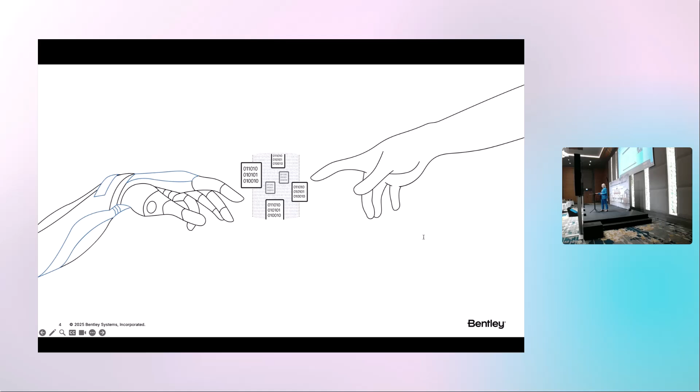And that is one part of it. The other part of it is context. So engineering context also has to be available. While disciplines that we work with, like transportation, energy, water, or cities, they all have different needs and they all have their own different challenges. Some of them are the same, but they're also different. And then each of those sectors has, again, both similar but also unique engineering principles, rules, and logic. And this is what we mean when we talk about engineering context.

So the AI needs to be just as aware of that engineering context. And that's a bit more all-encompassing. That's not just the data, it's also how we utilize it and how we actually teach it to apply that intelligence. So if the relevant engineering context has been applied, that's when we actually succeed in training our AI well. So apart from this very wordy intro, I would like to spend the rest of this presentation showing you what AI can be capable of when data and context come together, and how we currently see it applied and how we try to put it out in the industry to hopefully influence your workflow before long, that you actually use it and that it helps you.

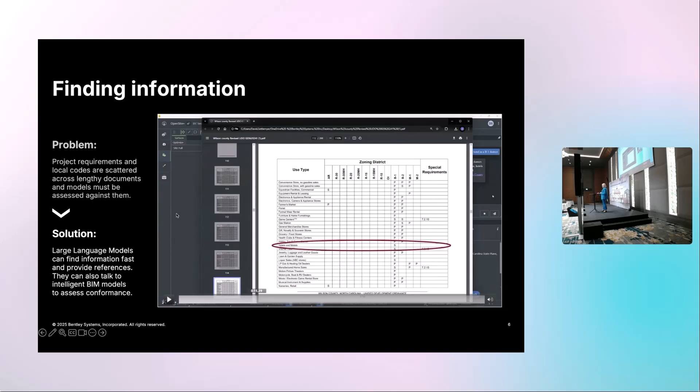I'm really sorry, when I tried it, it worked no problem.

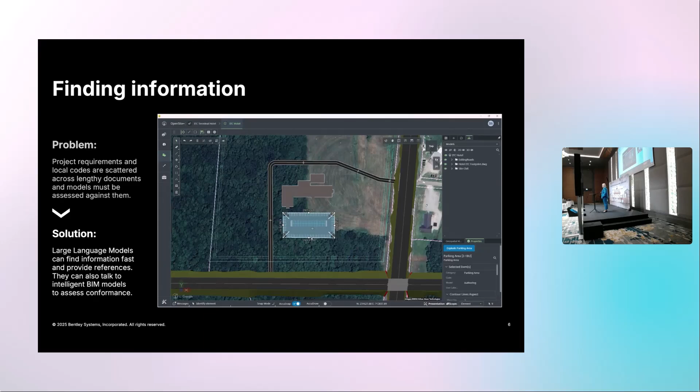It doesn't stop here though, as these large language models can also talk to intelligent BIM models to assess conformance and make sure that nothing is forgotten or omitted. As you can see, we're actually using natural language here to ask the model to check against requirements, like if something can be built here. That is, of course, a lot easier than trying to scan through a lot of documents and find that information yourself, manually.

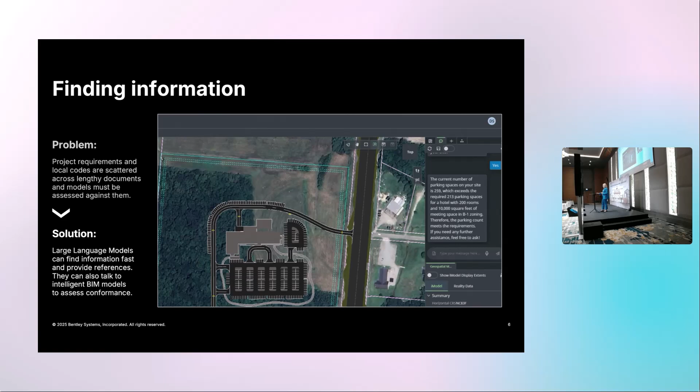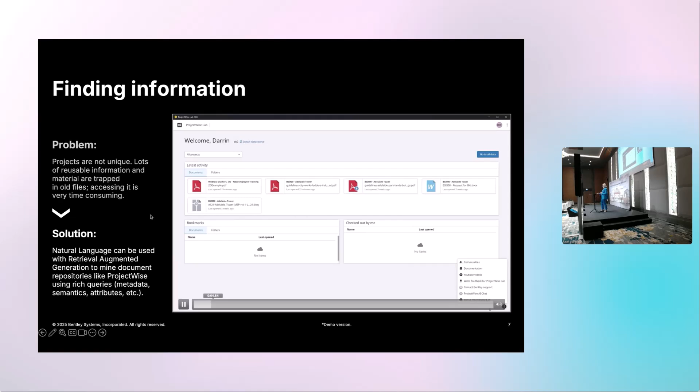The next example about finding data is, and I hope this runs, also gets stuck. The problem with presentation mode.

So there's a lot of information in your projects already. Projects are not unique. You may have done something similar already, in a whole bunch of projects before. The problem is, where are those old files? Is the information locked in old formats? Maybe it isn't even well tagged. You need several applications to open it, and sifting through a lot of material is, of course, time consuming.

So if you have a repository for your documents—in our case, that's a Bentley document repository—you could use AI to interrogate that repository.

While text search, I'll just try to advance this manually a bit so you can see what we're doing. Text search is, of course, nothing new, but... hang on.

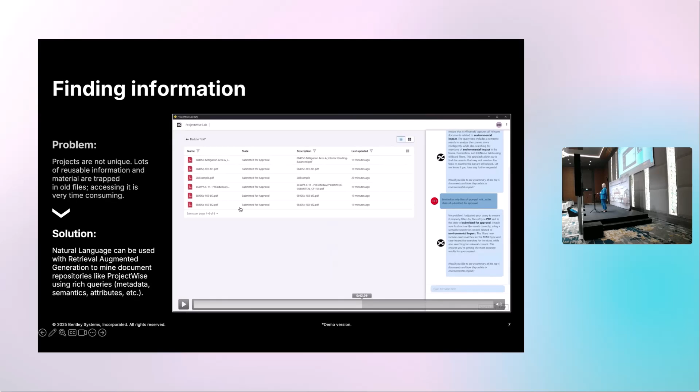The new thing is that you can actually use your own natural language query and refine the search based on what you actually need to find. That is, of course, a lot more convenient than anything we had before.

And the search selection that you then get, you can have a closer look, and you can also of course then jump to the files right from there to see if you really have the relevant information.

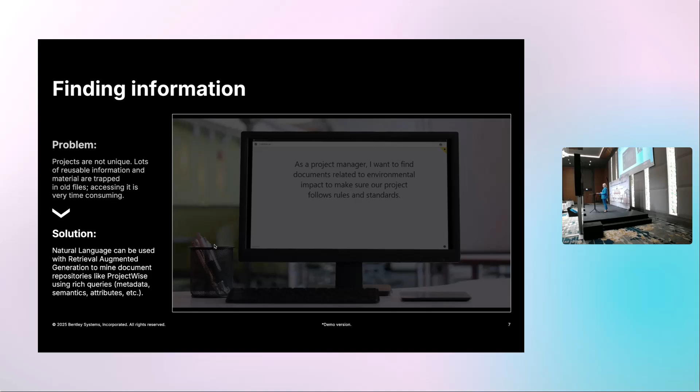Then another big issue is around automating tasks, and I'm talking specifically about creating drawings. Creating documentation, unfortunately, even in our digital age, will not go away. We will still be required to create paper. And that is something that I've understood is super, super time consuming—not just creating all those plans, but also making sure they're actually readable.

Something very simple: little text blocks that overlay each other. An engineer has to use very expensive and valuable time ensuring those little text blocks don't overlap but are moved out of the way, and are surrounded by some white space—we call that white space management at the moment. Making sure everything is clear and readable takes significant time and effort. I see Greg back there, and I know this is something you're struggling with, but I've heard that from other companies as well—it really costs a lot of money.

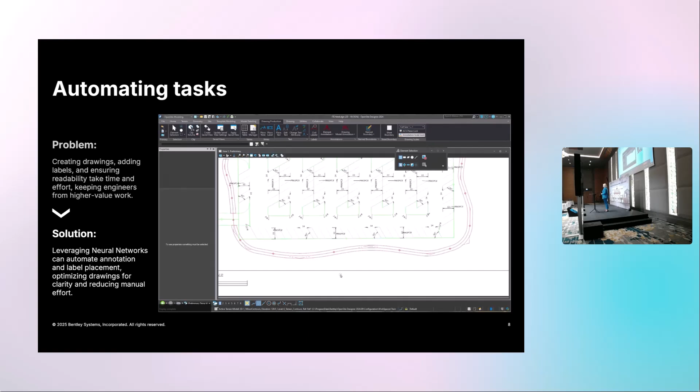So we have an example here where we have a neural network that automates annotation and label placement, and that way we're optimizing drawings for clarity with a lot less manual effort. That was probably the main use case we got from our users to apply AI in—documentation and drawing production—especially making it a lot easier with the annotations to ensure they're readable.

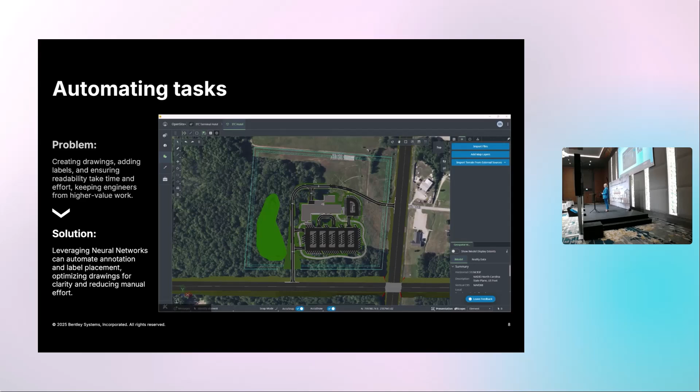Next, let's talk about exploring the design space. This is about exploring different options and using the data contained within.

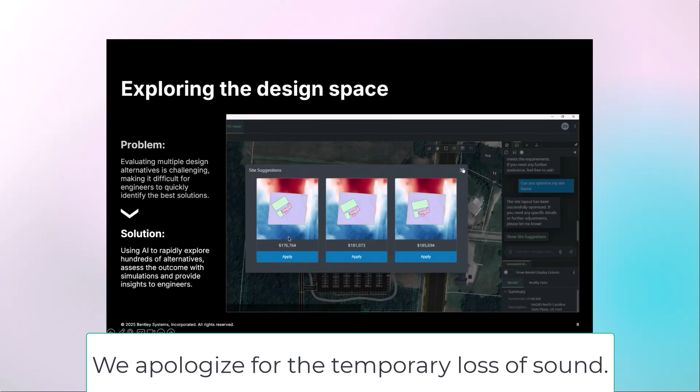Some of those decisions may be driven by cost, but there may also be reasons to apply or go for an option not just because of cost, but these parameters are up to you and are defined by your project. In any case, evaluating multiple design alternatives can be challenging, because if you do everything manually and try to bring it together with costing data, that means having a whole bunch of documents open, a lot of checking efforts, et cetera.

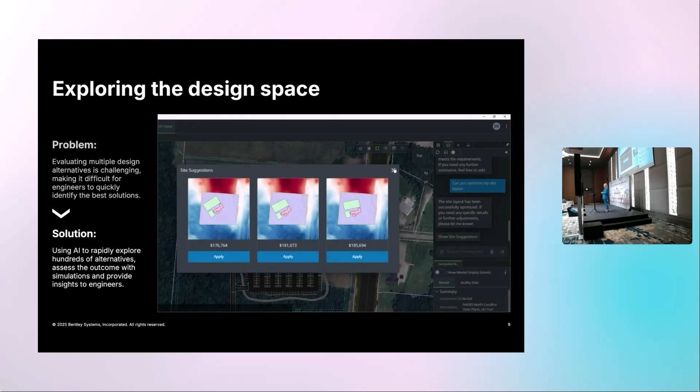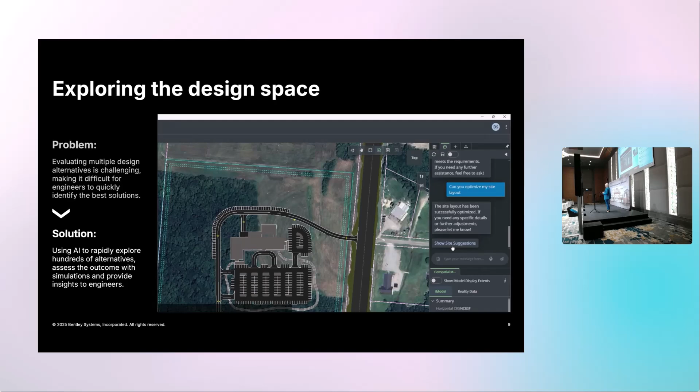So AI obviously can help with that, especially when it comes to bringing data together. Our AI Copilot now is picking the best option based on cost to optimize the site layout. You can see that when we do this, you pick one option, and then we still do some changes to the layout, and we arrive at the best possible option for our site. A lot of that is done by telling the AI in natural language what you want it to change. That is a big productivity gain to rapidly explore, match it against your parameters, and log the data contained in there, and it brings you a lot more insight.

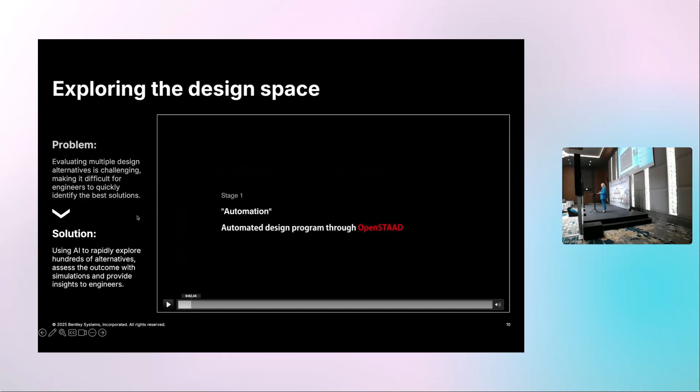If you are more on the structural engineering side, you can bring AI together with automation. In this example, if it does run - it's another one that stopped. You can see that we are automating here a big structure. It's a roof structure, and this is not AI - that's just automation based on a macro where we get all sorts of different options for a steel structure.

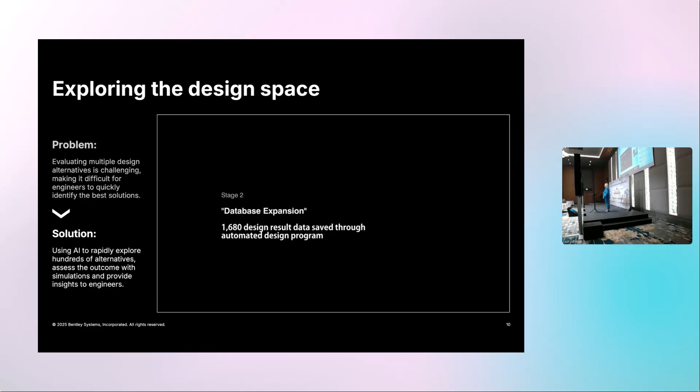I think it's exactly 1,680. That is saved now, and now you can again bring additional information in. That's where AI comes in, and you overlay that, and you can literally explore 10,000s of options that way, like this best preferred steel structure - what is the best possible material you can apply to it. So you can see we actually expanded it to 27 million and something.

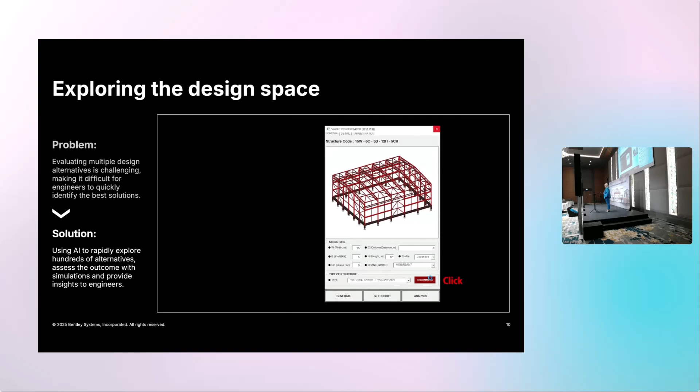Applied, and that way it can actually go as far as costing and again provide you another layer of evaluating. This is something that would have taken a structural engineer probably a few weeks, but you can do that in hours now if you simulate it like that.

Again, there's a need for data openness. The whole structure needs to be open, but also the documents where you find the information that will be aligned with the structure and with the actual model - that also needs to be accessible.

Of course in our industry, the design phase is only short, pretty brief in the context of a whole project. If you look at construction, it very often takes longer than design, or usually takes longer than design. And then the operations and maintenance phase, even longer.

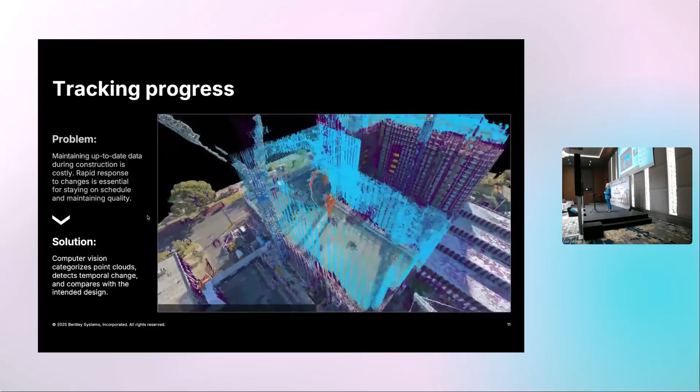How can you apply AI to track progress? Pretty easy to see the benefits. You can take computer vision of your actual progress on site, of the building site, what's happening, and you can overlay that with a model that you built in the computer. Like the definition of a digital twin, as we heard this morning, is that there needs to be a real physical asset there. So a BIM model that just exists in theory is not really a digital twin quite yet, but this is where you bring the model into reality and where you can actually see a digital twin really emerging through that added layer of reality.

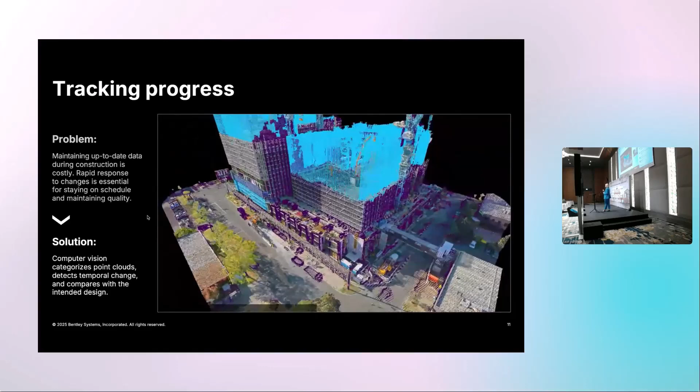And of course, it also helps you to detect temporal change. You can compare with the intended design. You can spot where there's divergence, and pretty early already spot problems during the construction.

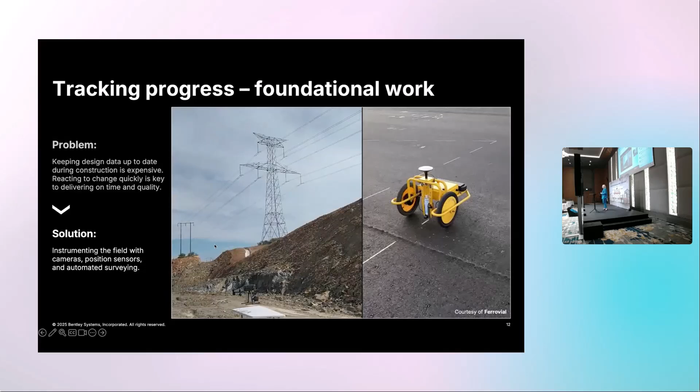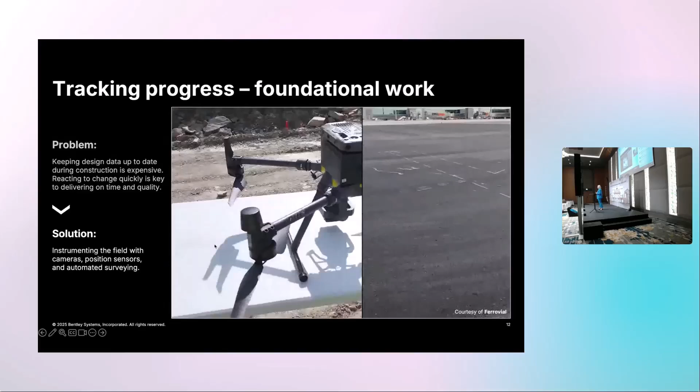That doesn't just apply to buildings. I'm an architect myself, so the building examples speak always a bit better to me than the more linear examples, but I know we have road and rail designers as well, and in Bentley that is pretty much our core work too. So you can do the same, keep design data up to date during construction, and especially with more expanded projects, it gets even more complicated than with buildings because you're looking at a much larger area. But if you instrument the field with cameras and position sensors and automated surveying, you can use those sensors to check in, to automatically monitor from check-in points whether your intended design is really what is going to be put into reality.

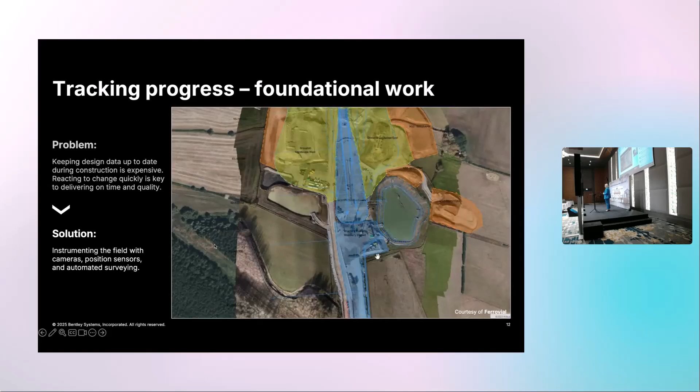So let's move to operations and maintenance. As said, we are mainly working in infrastructure, and there's a lot going on with roads. It's about the status of the roads. Do you have potholes? Are the roads well maintained? Are there any risks for accidents? But of course, there's also a lot of elements in roads that

May or may not be visible. I think the video hangs, but for me it's running. I don't know why there is a delay.

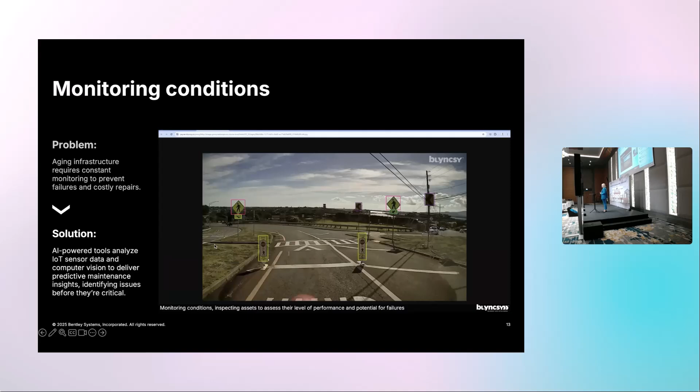The fact that infrastructure is aging is not just a problem in Germany, and we're very keenly aware of it at the moment, but it's a problem globally as well. So AI-powered tools that can analyze IoT sensor data and computer vision are very powerful because they enable you to check long stretches of road and actually make sure that everything is visible that is going on those roads, whether traffic lights are not working, whether a roadside is damaged, and whether there's any risk for accidents.

Unfortunately, the video doesn't run well. I don't know. Okay, now it's running. Okay. Anyway, you can see what I was talking about.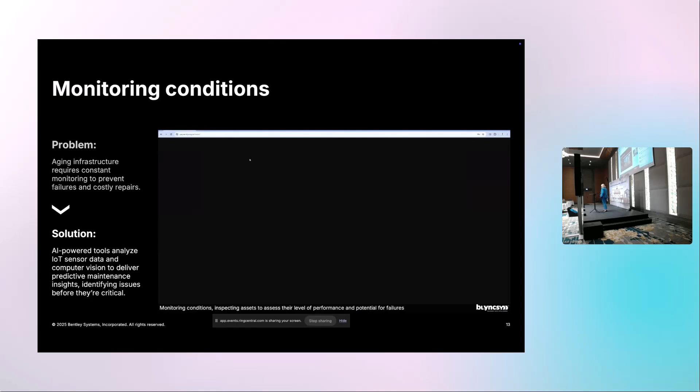So it's about a network of roads here, and you can check computer vision data, and this is actually being produced by just driving in a car using the camera that you may have, and it will monitor the roads, all the signs, traffic lights that are along those road highways, and feed the data back into your model. And the AI can also help you analyze where there's conditions that are not as they should be.

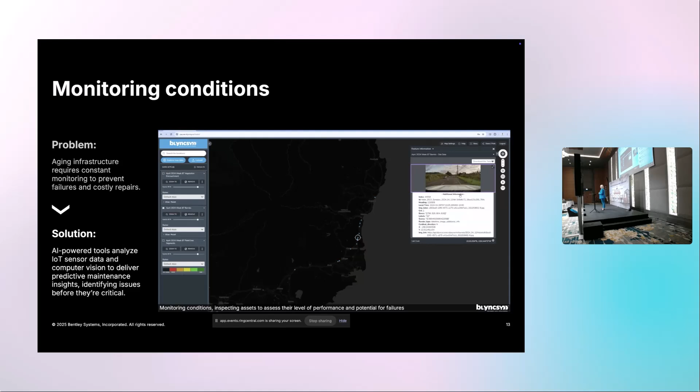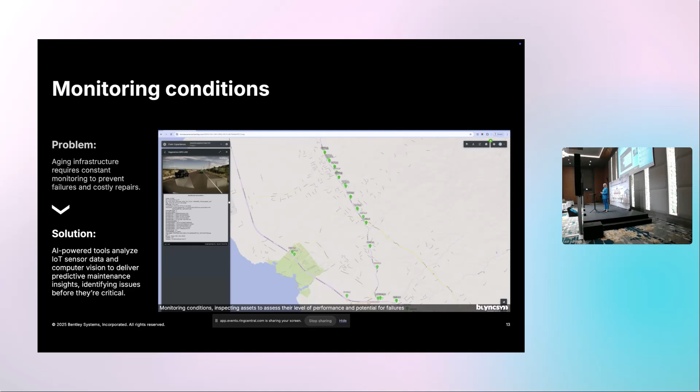You can see in one of the examples that there is a pothole in the road, there's a traffic cone in the middle of the road, so somebody needs to come pick it up. These are all things that will be very hard to find if you try to do that manually. You would be driving up and down that road network like crazy. And that way you can use artificial intelligence to detect that, but it's also recorded automatically and overlaid automatically. So pretty cool technology, and especially for government agencies who are surveying and maintaining roads, this is a big relief.

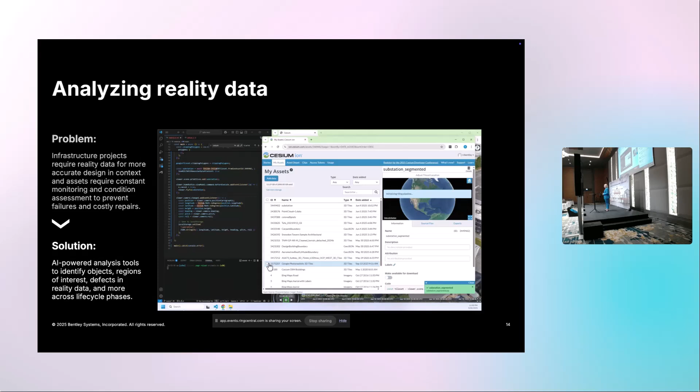Now, the last example, a bit in line with what Christoph showed this morning, is about analyzing reality data. I'm using Google 3D tiles here for the backdrop, but we also brought in a more detailed design model. Again, we're showing here how you can overlay this data. You can both put it in context, but also put in this little substation to make sure you can actually see it in its context.

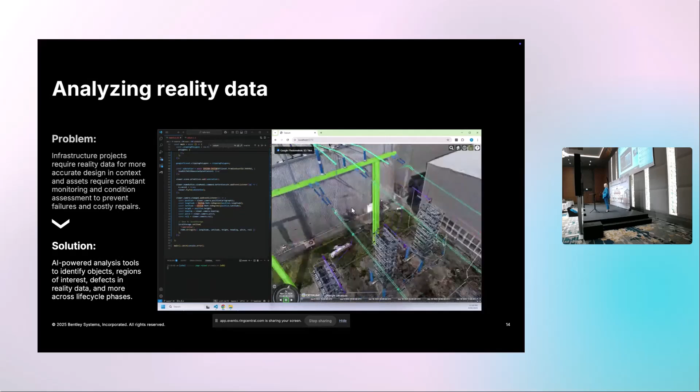But you can also enable AI to do analysis, to identify areas that are not as they should be, and AI can detect it automatically if there's areas that don't look like other bits and pieces in that model, to help you really be very fast and upfront with any issues during operation and maintenance.

And that's pretty much what I wanted to show you. So a quick roundup in where we are and where we see the industry going through a few critical infrastructure life cycle phases.

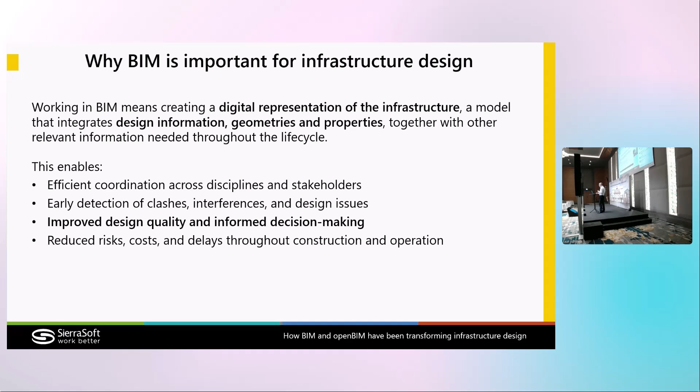Working in BIM means creating a digital representation of infrastructure, a model that integrates design information, geometries, and properties, together with other relevant information needed throughout the life cycle. This enables efficient coordination across discipline and stakeholders, early detection of clash interferences and design issues, improved design quality and informed decision-making, and reduced risk, cost, and delay throughout construction and operation.

The adoption of BIM has a strong impact on infrastructure design. Even if BIM increases initial cost and complexity, it creates significant opportunities for efficiency and quality. This impact can be effectively managed by using effective and efficient software tools, adopting open standards, and following an optimized workflow based on effective tools and standards and consistent with the domain.

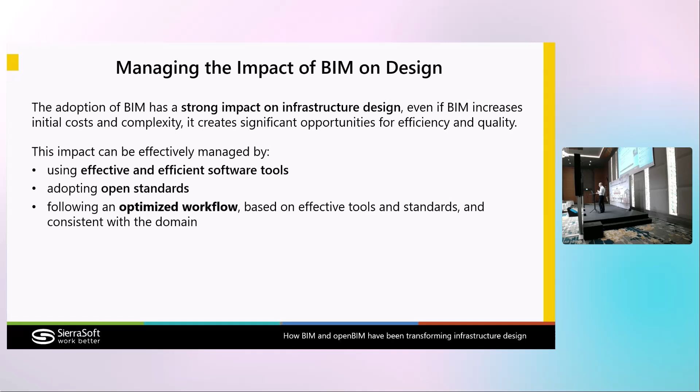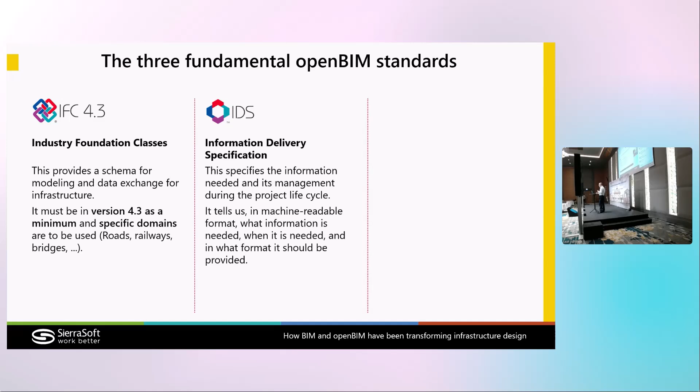There are three fundamental openBIM standards to use during the design phase. One is the IFC. It must be in version 4.3 as the minimum for the specific domain to be used, roads, railway, bridges. IDS, the Information Delivery Specification, and buildingSMART Data Dictionary.

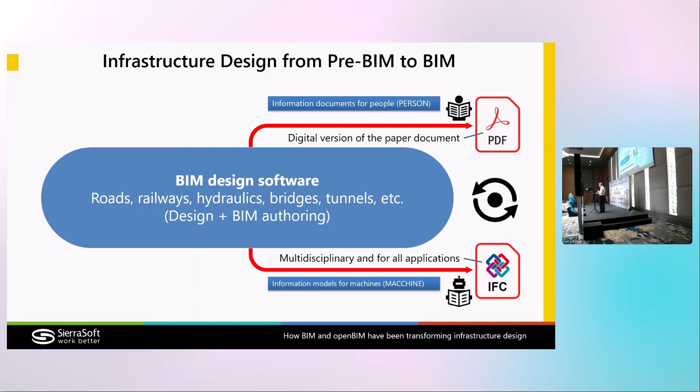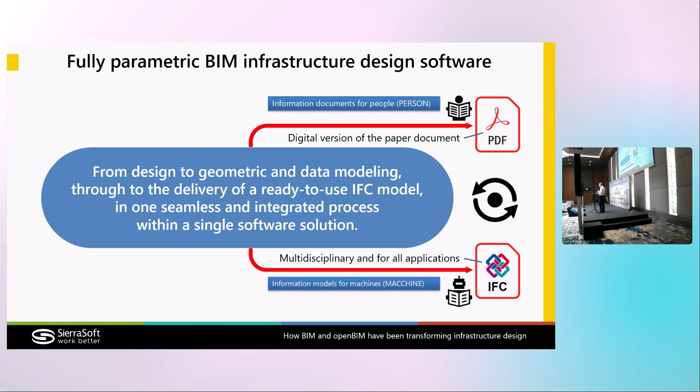The only way to make design effective and efficient is to use software that integrates everything into a single solution. You need a fully parametric BIM infrastructure design software, from design to geometric and data modeling through the delivery of a ready-to-use IFC model in one seamless and integrated process with a single software solution. A single software that integrates features of design and geometry modeling, structure and data modeling, model exchange and federation, and model analysis and validation.

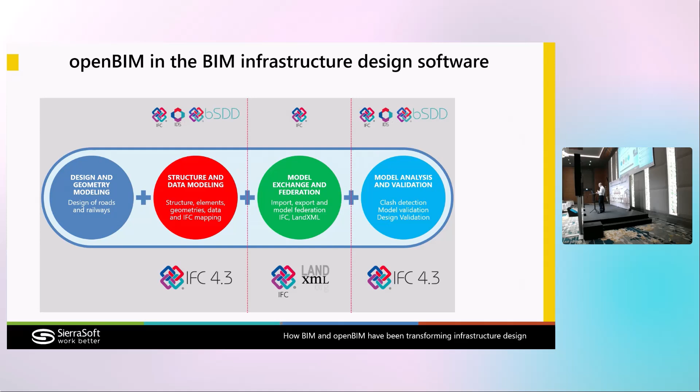How openBIM integrates into the design process. We use IFC, IDS, and BSDD during the structure and data modeling, IFC for model exchange and federation, and IFC, IDS, and BSDD for model analysis and validation. With a parametric system like this, the final model is automatically updated every time a change is made to the design or data. The focus is on design, the result is the model.

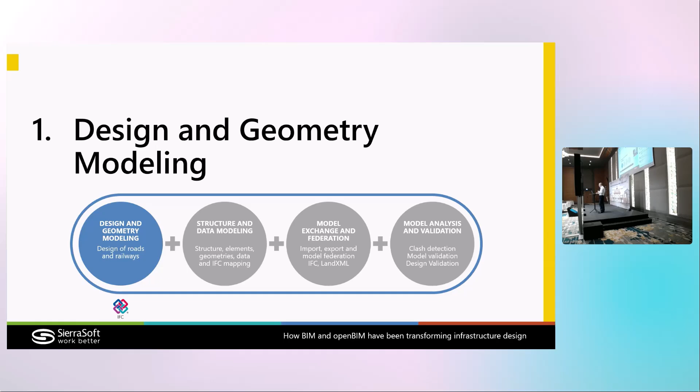And now a practical example in how BIM and openBIM have been transforming infrastructure design. It's a demo with our solution, the software is SierraSoft Infra Design Studio. For first, design and geometry modeling.

The design of the road is done in parametric and dynamic mode with the definition of the horizontal and vertical alignments and the typical section of the different segments. Real-time and repeated checking are performed to bring the road up to standard. The information models are obtained automatically from the design, applying the information modeling parameters, structure, geometries, elements, and data. The main difference from pre-BIM design is the high quality of the geometry required to create a useful digital representation. Geometry are the result of the design, but they also influence the design.

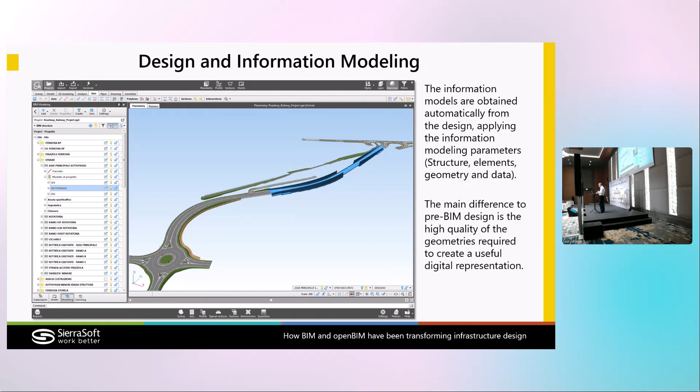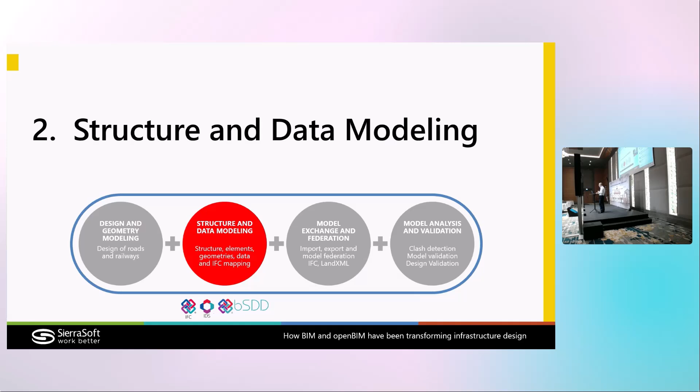Structure, elements, and data must be modeled and mapped in order to be shared. IFC 4.3 allows us to do this. BSDD and IDS support the data modeling process. The project is modeled using IFC 4.3 structure and elements.

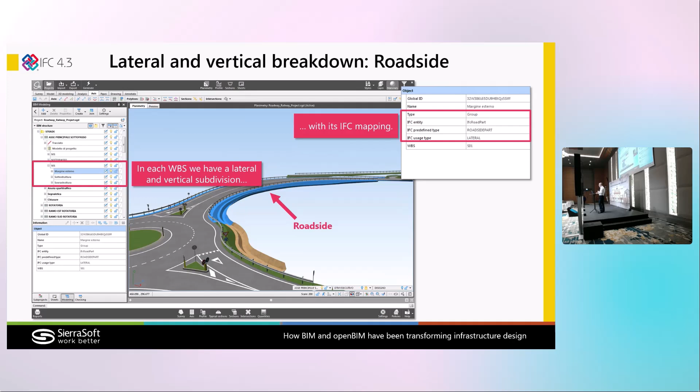The model has been divided into WBSs. The WBSs are mapped in IFC, and the required data was entered for each WBS. And this is the other WBS. In each WBS, we have a lateral and vertical subdivision, in this case roadside, with its IFC mapping. And another case is for the substructure, and the other part.

The project is modeled using IFC 4.3 entities and enriched with the required properties. Inside the lateral and vertical subdivision, we find the elements with the IFC mapping and properties previously defined. We have examples with the ditch, side slope, and wearing course, guardrail.

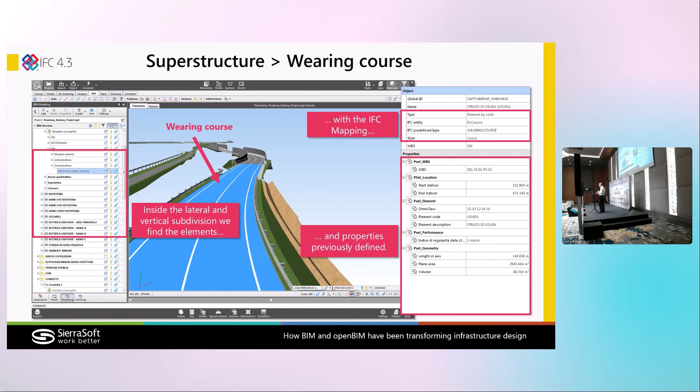We can use the BSDD service to enrich the information model during the design phase. We enrich the information model by adding classification and property parametrically to the entities. We start with a simple example of how BSDD is applied in design. A geometric model of road defined by its structure and elements, but with no properties assigned yet. In our case, for example, the wearing course still has no properties.

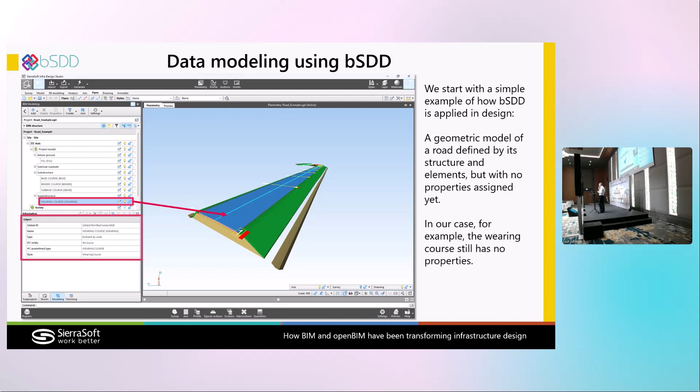We open the windows to define the BIM property styles, which parametrically define the properties of the BIM entities. No properties are assigned, so we add to the wearing course.

To add properties, we use the buildingSMART BSDD service. We press the BSDD button and select the required dictionary from the list of dictionaries available on the buildingSMART server.

Information about the selected dictionary appears, showing general data and classes like course and wearing course. We can see the properties of the wearing course class.

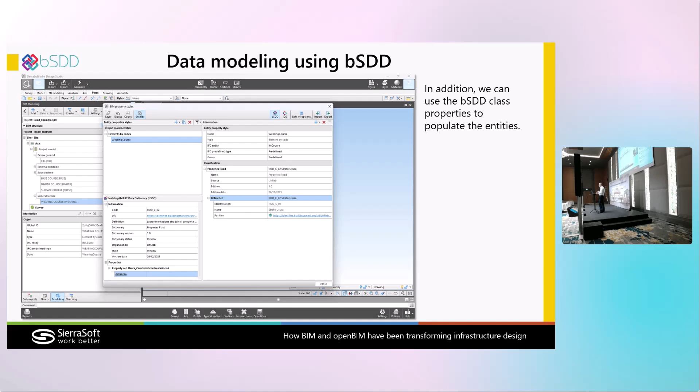We add the BSDD classification to the entity property style, which controls the creation of the wearing course. In addition, we can use the BSDD class properties to populate the entities, for example, the adherence property.

We can use the IDS standard to validate the model during design and also for data modeling. We press the IDS button to open the list of used IDSs and add the provided one.

Once loaded, the system immediately performs verification of all entity property styles in the project and reports any issues found. The software reports, in this case, 3 issues.

The first is the missing classification, IFC course according to BSDD IFC 4.3. To resolve it, we connect the second BSDD service, and after finding the course class in the IFC 4.3 dictionary, we select it and add it to the wearing course entity property style.

It now has the 2 classifications required. After resolving the first issue, the classification, we address the second issue, the missing thickness property.

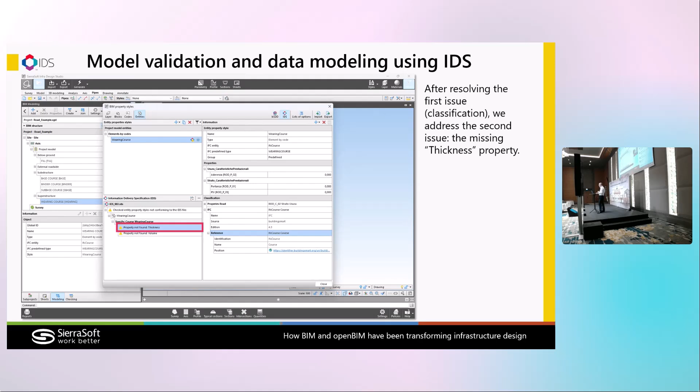We add the missing property, and finally we add the second missing property, volume, resolving the last issue. The software now confirms that the model conforms to the IDS used.

The model obtained from the design now contains all required elements and properties compliant with the IDSs. Any change in the project or model is automatically updated without extra modeling cost.

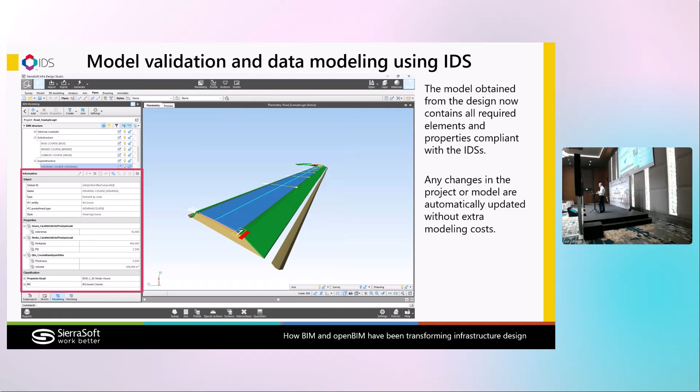Here now is an example of how information model exchange improved design. The project requires the design of an underpass. The road designer sends the alignment and information model to the underpass designer.

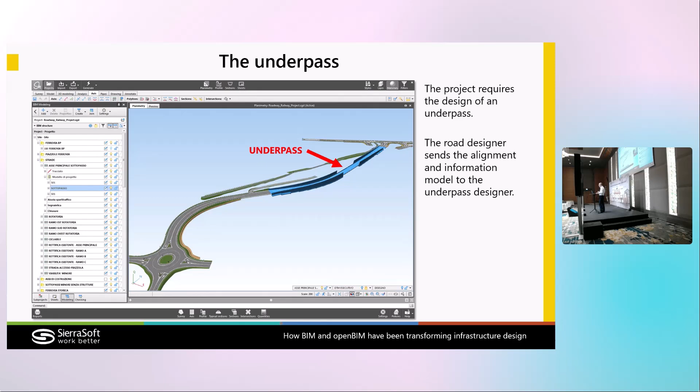The underpass designer completes the design and sends it back to the road designer in IFC format, so that he can integrate it into the design.

In SierraSoft Infra Design Studio, the underpass is imported, inserted, and georeferenced. The underpass information model now becomes part of the project, and you can query the information model and get all the information you need.

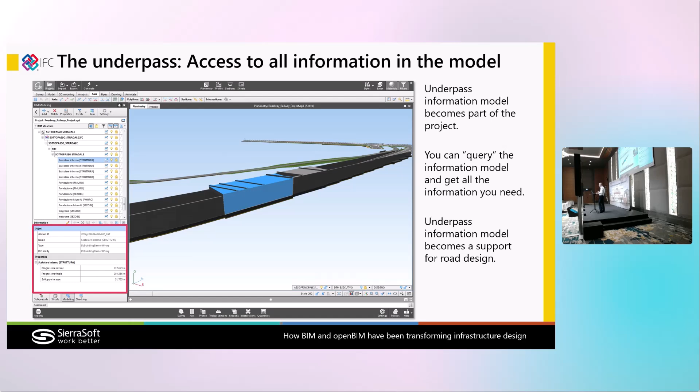The underpass information model becomes a support for road design. For example, in longitudinal profile management, underpass reference can be obtained automatically. Cross-section management can also be integrated with information extracted from the underpass geometries.

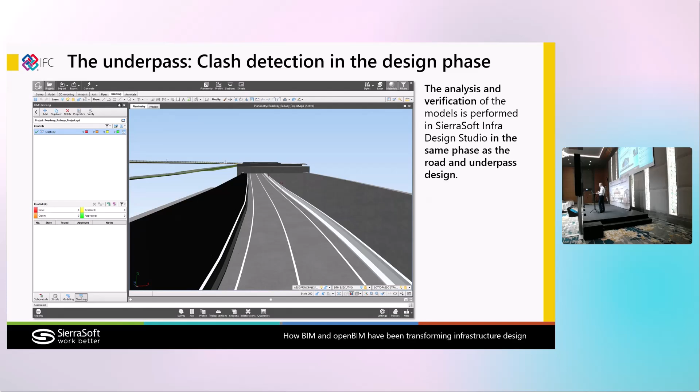Model analysis and validation. The analysis and verification of the models is performed in SierraSoft Infra Design Studio in the same phase as the road and underpass design. Problems are identified at the beginning and solved immediately, with a significant reduction in time and cost.

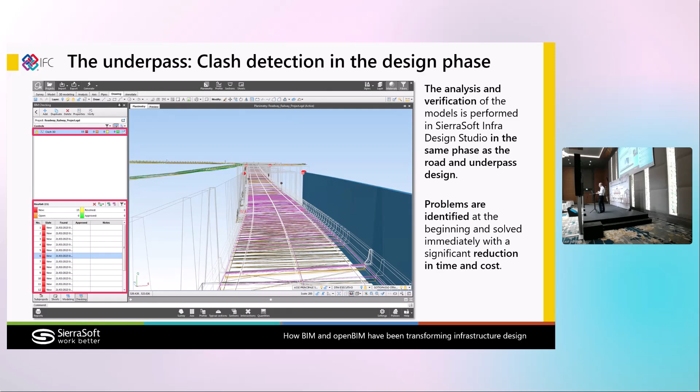Reports with critical issues can be shared with other designers using BCF or Excel format.

Model validation, model and design validation. Model and design validation are key aspects of the BIM and openBIM process, ensuring that infrastructure models are consistent with design requirements and compliant with regulations and standards.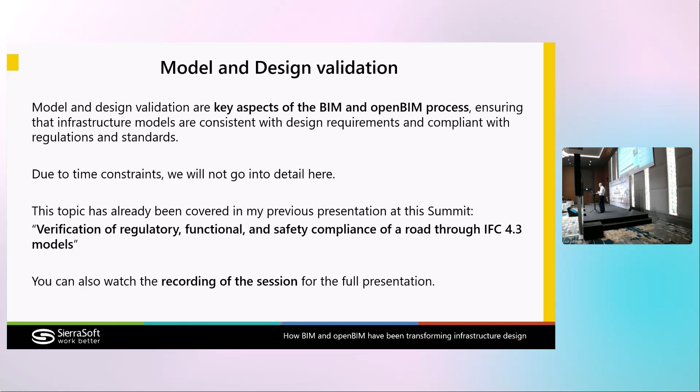Due to time constraints, we will not go into detail here, but this topic has already been covered in my previous presentation in this summit, verification of regulatory, functional and safety compliance of a road through IFC 4.3 models. You can also watch the recording of the session for the full presentation.

And now the conclusion. BIM is a strategic enabler, fundamental in a modern infrastructure project. It transforms the way infrastructure projects are designed, managed, and delivered. It offers significant opportunities in efficiency, control, and quality, but it could lead to higher cost and complexity in the design phase.

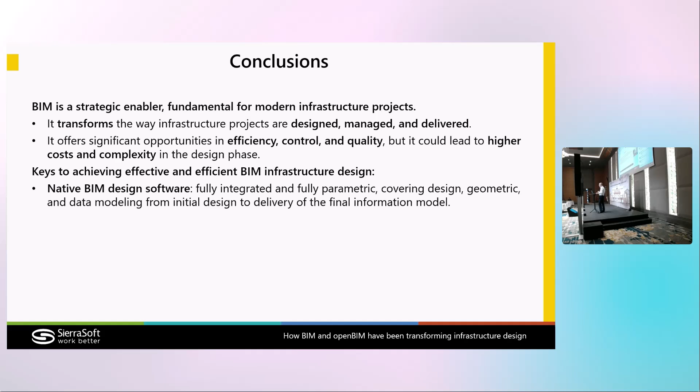Keys to achieving effective and efficient BIM infrastructure design: native BIM design software, fully integrated and fully parametric, covering design, geometrics, and data modeling, from initial design to delivery of the final information model.

Open standards, IFC 4.3 for infrastructure model sharing, and IDS and BSDD for data modeling and data validation. At the end, our experience is that once you start to design in BIM, it becomes the only way forward. That's all. Thank you very much.

Got it. And what I'm here to present is not the entire LeapThought system. What I'm here to present is just the AI machine learning functionalities.

What we've tried to do, and I mentioned this yesterday, we started as a group of systems engineers looking at a problem from a distance. Not necessarily architects, not necessarily design construction engineers, but people looking at a system and a process of building, from design to supply, to build, to handover, to maintenance and monitor, to takedown, cradle to cradle. And obviously, many systems are not designed to provide every element of that role. Everyone has different softwares to do different components of that, which is great. That makes sense. That's how the world evolved.

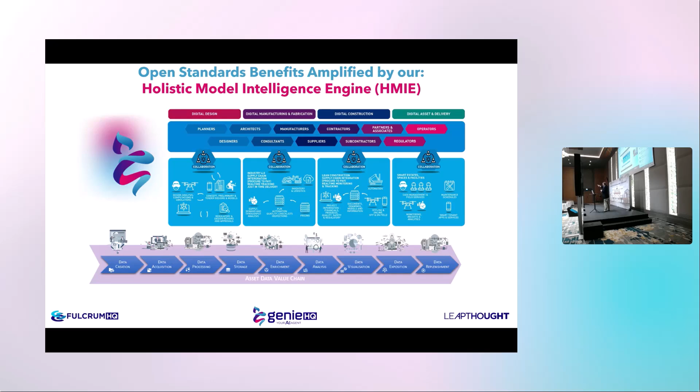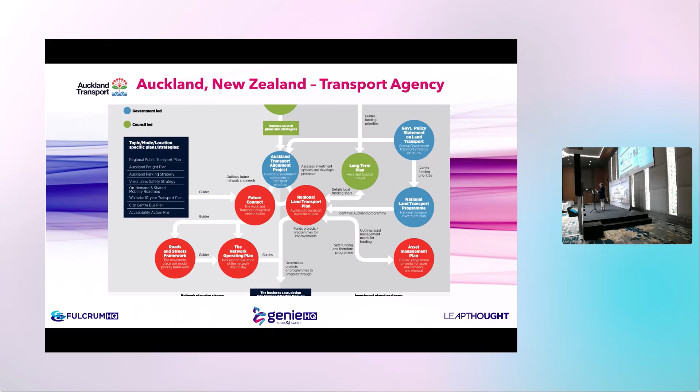This design was an approach basically supported by and requested by different governments. One of our first starts was in Auckland, New Zealand. Auckland had a system where they had 9 different community transport organizations, and they decided to make one. They asked us to come up with a system that would incorporate and integrate the various different data sources into a unified source, but would not necessarily threaten existing users unfamiliar with anything besides their native use. So we developed, over the course of 9 months, a system able to incorporate their entire data set for all of their regional transportation planning. It's up and running now, and has been for over 10 years.

So in essence, every time they build one, they have that full data set already engendered in their systems. LeapThought does not maintain or hold their data—the data belongs to the enterprise owner. And they're able to apply those same models again and again for their subsequent construction. It saves a lot of time. It saves a lot of money.

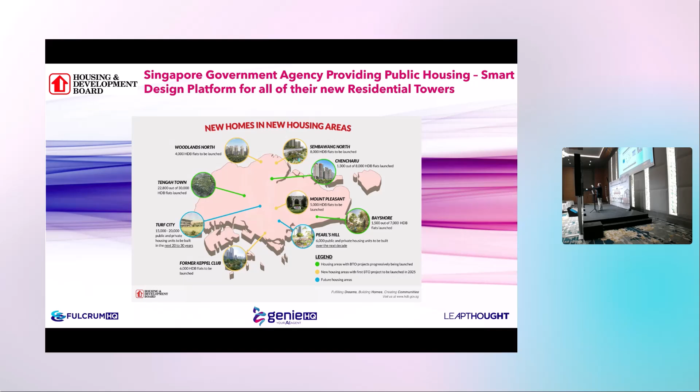Fulcrum can be configured such that there are various levels of users, from the architect all the way down to the supervisor engineer—various levels of correspondence. And the beauty of the system, especially from the perspective of an enterprise owner, is that all the data is captured. This is your digital twin. By the time you're done, you have your twin. We're not going back in time trying to create one—it's being developed through that entire construction process.

CoreNetX. CoreNetX for me is an important step forward in showing the value of AI and machine learning. CoreNet was a dream for Singapore for a long time, but basically what it is, is setting up a system so that all 8 of its regulatory agencies can be online at the same time, providing virtual approval at every step of the construction process. That sounds quite simple. It wasn't simple. And we're talking about the case of Singapore, which is a single city-state.

Why is it not simple? I was having this discussion with Nick from the UK the other day, who worked on earlier versions of Singapore's CoreNet. It's not simple because you have to be able to ingest every law, every regulation that exists. In the case of Singapore, there are thousands and thousands of regs. And in the case of the countries that you represent, there are many more. I'm currently living in the United States, and it's not just a city's regulations—it's a county's regulations, a state's regulations, and federal regulations.

The first step in the case of Singapore was having to go through a very extensive process of consensus with the qualified persons, the QP, the people who actually would interpret and agree to an interpretation of the language for regulation.

I mean, is this a panel? Is this a screen? Is this a wall?

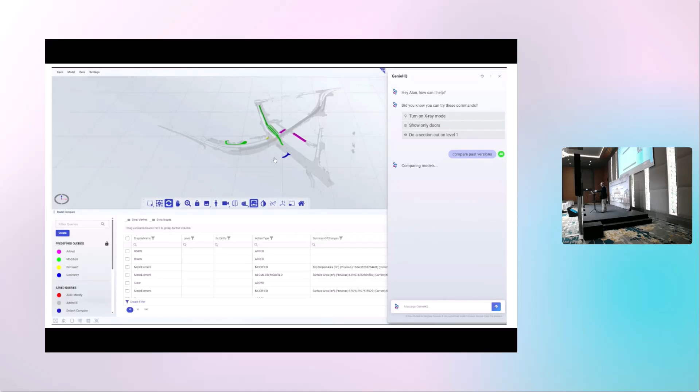This is an example of a transport system in New Zealand, where basically what they're doing is cross-section cuts, comparing models. The different colors help a regulator understand what changes have been made. Maybe an initial design went in, and it came back with checks, and then they redid the building.

And then they carried out a second level of cross-checks. So the purple in this case are added, the green were modified, yellow was a removed concept. So that's what that one was showing.

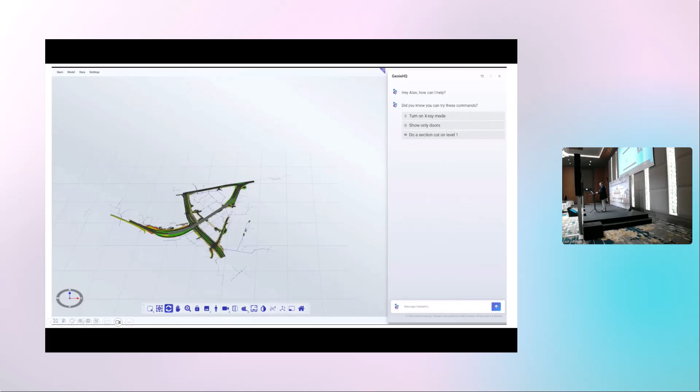So this simply lets people ask questions: give me the sizes for bus requirements, give me the breakdown or the skeletal analysis for fire, whatever it might be, and the system can basically read it and tell you this, which is quite nice. It's like taking that next step to kind of bring simplicity to the entire project.

We're telling it now to take out the fire discipline, remove that, and you can just keep going deeper into whatever level you might need. If you're a regulatory agency responsible for fire, you don't necessarily need to see the whole building. You do want to see exactly what the fire codes are in the application.

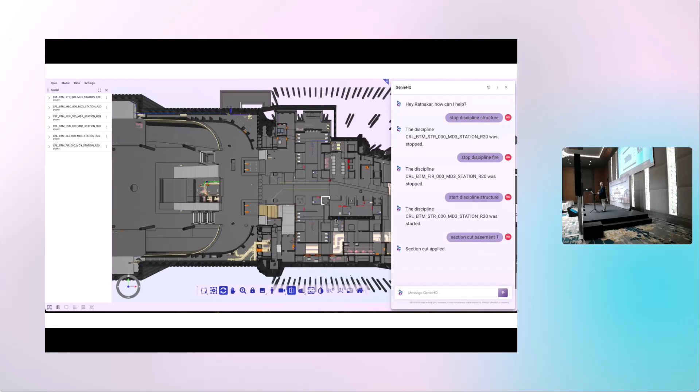So this is now just going to do a cross-section of that same building. These are actually real use case examples. We're able to hide it, and then we can re-show it.

We take the existing data sets that are provided and build the model as is, but because it's built on different levels and from different elements, we're able to remove them as required for a specific user. So your BIM model is there, and you can break down and take away segments to dive deeper into other specific components.

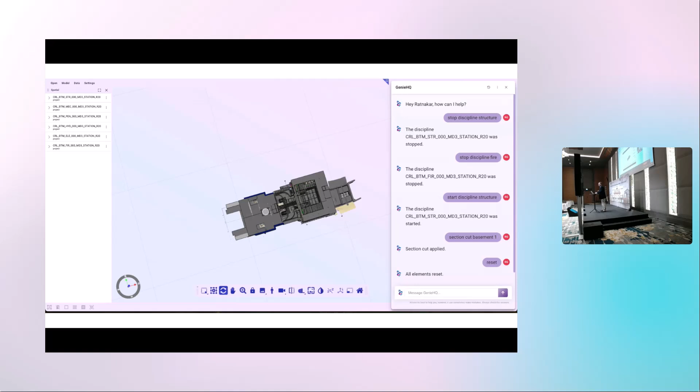By the way, this is not a 15-minute presentation. My CEO usually does this in an hour, based on people telling him what they want to learn or look at. We don't have that much time, but it's sometimes nice to see that behind all the talk, there is something going on.

This is AI machine learning driven. It couldn't be done otherwise. Remember, these systems were probably built on Bentley or Autodesk, etc., so we've had to incorporate and ingest their data sets. Some of them are harder than others, and some are trying harder than others to make things open standards.

We've got staff, I'd say 75% of it is PhDs in computer science, architecture, and engineering, who are doing algorithms to try to understand how to make AI more effective in its deliverables. Again, here's that cross-section look. Let me see if I can get this one to go on.

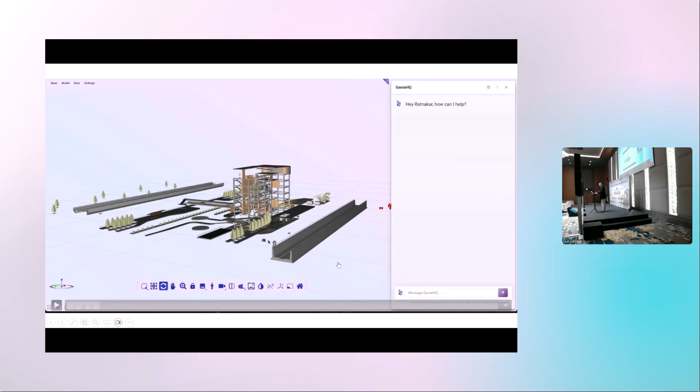I'm coming back to this one because I want to show one more thing, and this will be my last video. This look is also now looking dimensionally. We had Esri here, but he's gone away. This is actually us being able to capture Esri data or any other geospatial data and incorporate it into all of our BIM work, then carry out that analysis.

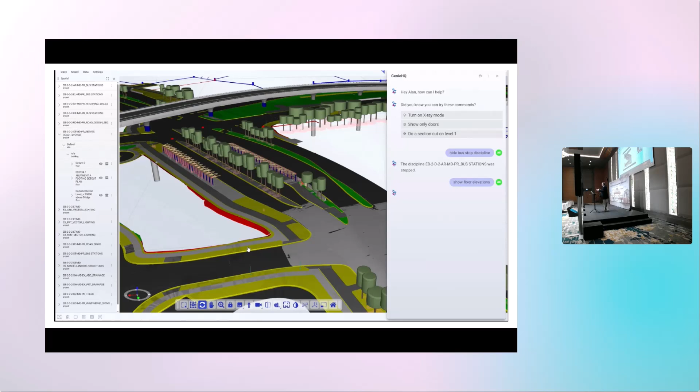So you're actually able to do levels and analysis, capturing data from the actual site. We've spent a lot of time trying to do that integration. Now that Esri has openBIM, our next offer to them is going to be to put Code Checker right on top of it. You can build right on top of that system. And that's where we're going now.

This thing is going to end by asking for some structural data on this bridge - elements, how many beams and columns - and this one's isolating the elements, 17,043. This is a specific bridge also in New Zealand. I'm going to skip that.

Time is short, but I wanted to say that in essence, it's not just AI - it's intense, rugged, industrial scope level. The amount of data it has to manage is significant. Those who question whether you can do regulatory checking mechanisms - as a lawyer, I understand, because the problem will always be interpretation of the rules, and the rules are not always in line.

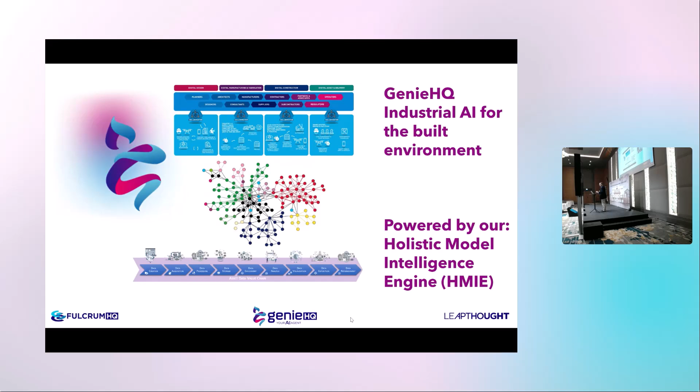But the more you can get organizations to work effectively together, to have uniform language - this comes back to organizational management, a non-IT technical argument - the easier it is to apply IT solutions, machine learning, and industrial grade IT to problem solving. So functionally, that's in a nutshell what we've been doing in terms of AI and ML. This is now running on about $300 billion worth of projects throughout the world. It's pretty cutting edge - we're really happy with the results.

Singapore is a great test case. That's why we were happy to have the last buildingSMART summit there, because people could just talk to people in the government. It's always better to listen to a user than it is to listen to a company rep.

At this point in time in Singapore, just as the test case, 90% of all construction is on this platform, which seems to indicate that they're finding it to be effective, responsive, and able to meet the vision that they set up for their vision of a digitally managed infrastructural world.

It's portfolio management, moving well beyond project management. It's in essence enabling people to start where they are, and as a CEO, to be working on one single screen, one pane. Some of you are CEOs, some of you work with CEOs, they don't want a lot, but they want to see those nice dashboards, and they want to be able to see the content. People below, we need to see submittals, we need to see requests, we need to see that whole overflow of information.

So LeapThought, cradle to cradle, from design, pre-design, design, supplies. We do a lot with DfMA, which is important in Singapore as a case point, through to construction, handover, and then maintenance. Whatever the systems that the government is using as native files, even ending up in Maximo, if that's where they put things, our job is to make sure wherever it is, it stays intelligent.